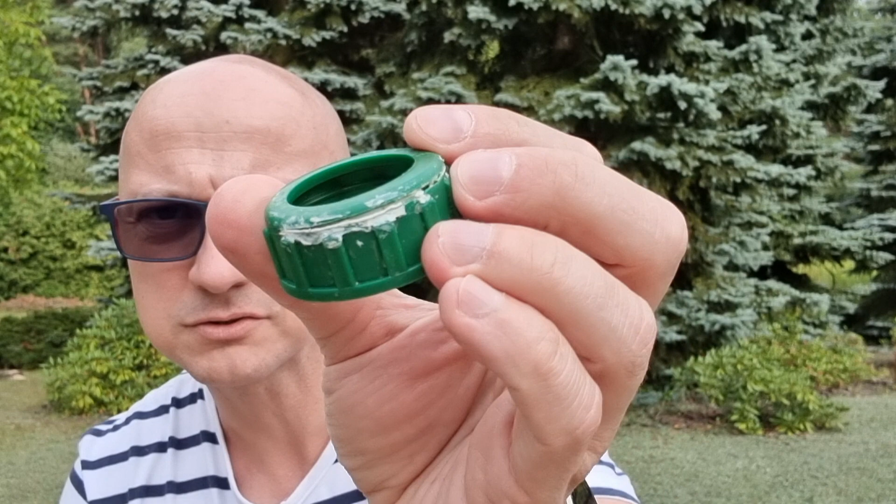So what happened here is this screw here that holds the thing in place actually broke, and as you can see here, my father tried to glue the thing, but it's super tough to glue something that is so close to your actual thread, right? So what I quickly did,

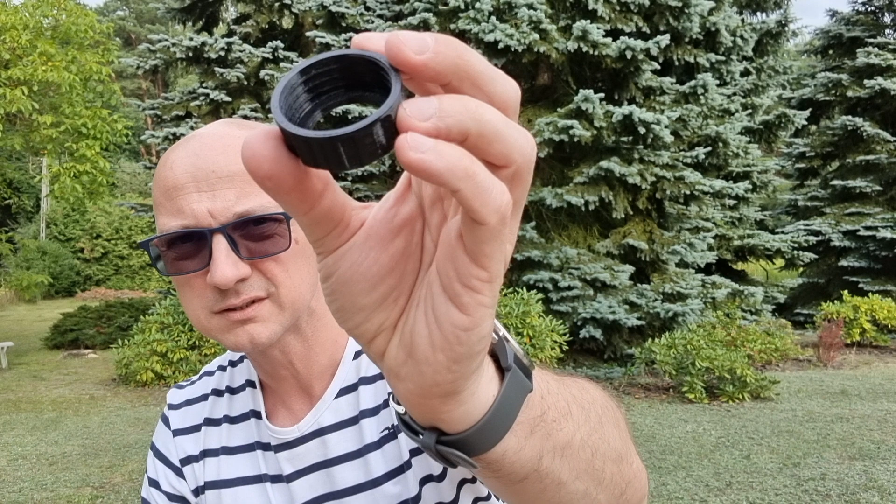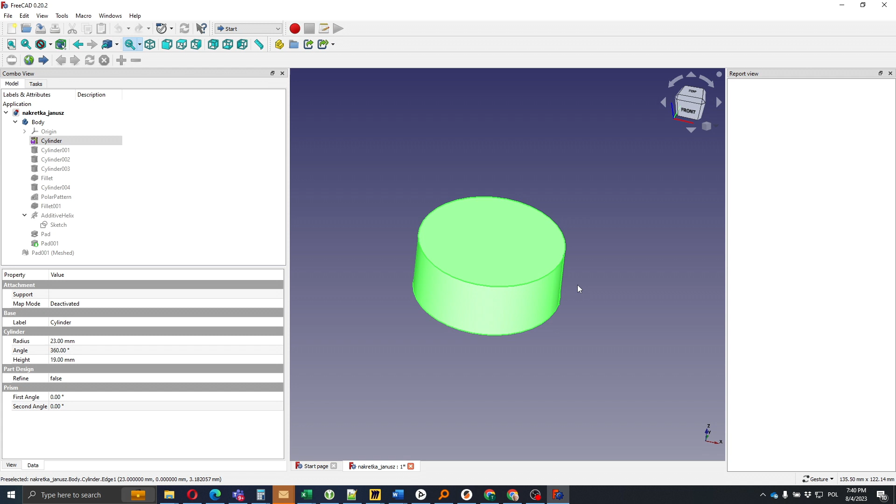I designed a spare part that here you can see quickly how it is designed. So it was not that tough because I had both sides of it to measure, so I knew what I need to design. So let's have a quick look at the design process. We need to start with the cylinder. That's the basic shape of the nut as I measured it.

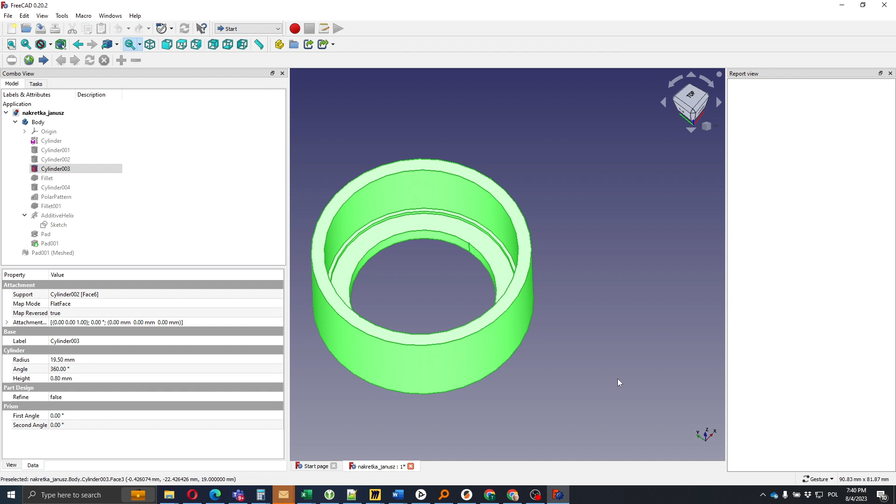Then we start with cutting a cylinder out of the first one, then another cylinder cut to make a hole, and yet another cylinder to make a place for the rubber that is part of this canister. And now what we will do, we'll fillet this edge to make it smoother.

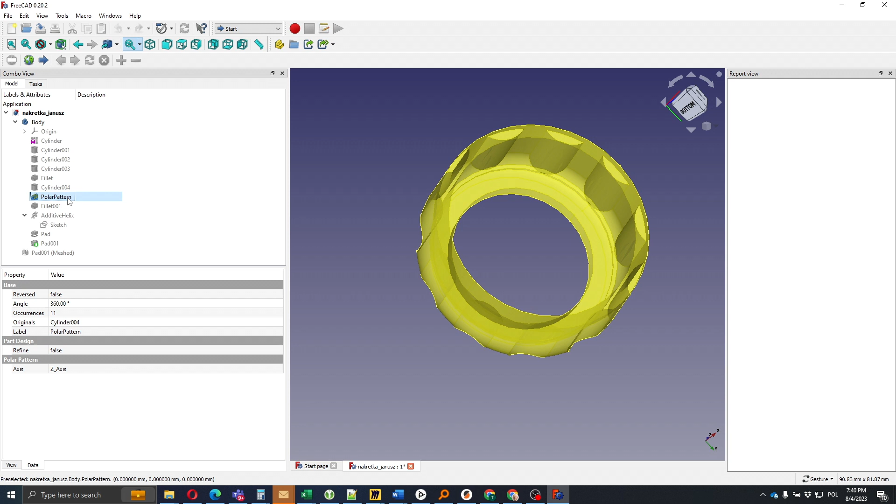And to make it easy to screw on, we need some kind of grooves on the side of it. So I've added one cylinder here as a groove, and then I've made it into a polar pattern. You can see it looks nice. And I decided I will be printing it on this face. So actually these tiny flat faces will be printed in the middle.

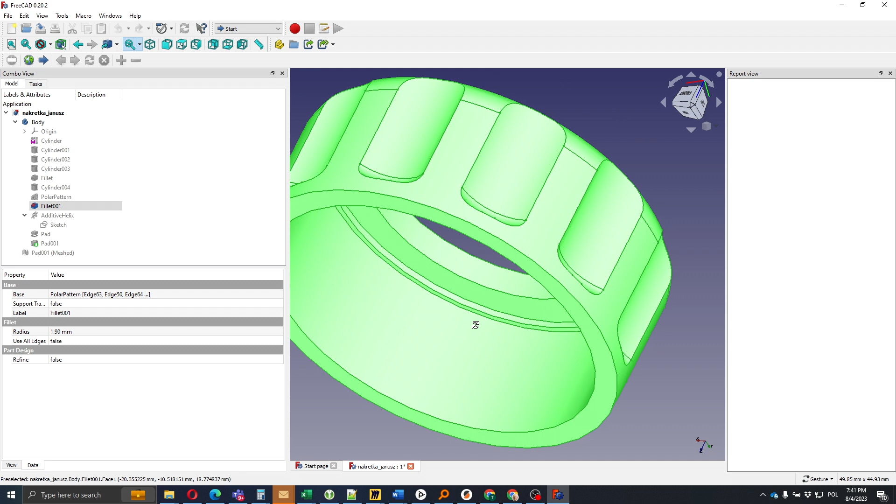They are so small that they would probably print nicely, but what I did, I added a fillet here, so the whole thing is even smoother and nicer. And now the tough part. What we need inside on this face here is a thread. So what we need to do, we need to start with a sketch. Let me use the section view. We start with a sketch

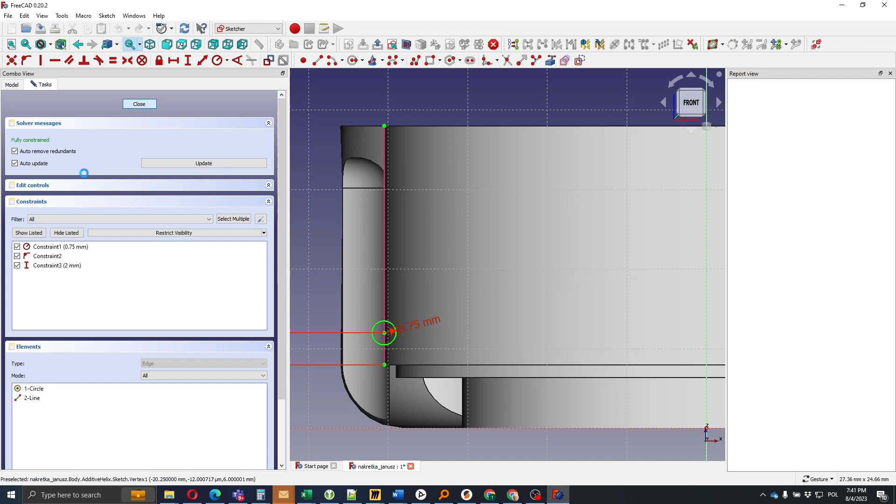and we'll make a helix. So we'll have this sketch swept over a helix. So here's the sketch, and here is the additive helix. And what you need to do, you just define the pitch of the helix, the height of the helix, and turns, and that's basically it.

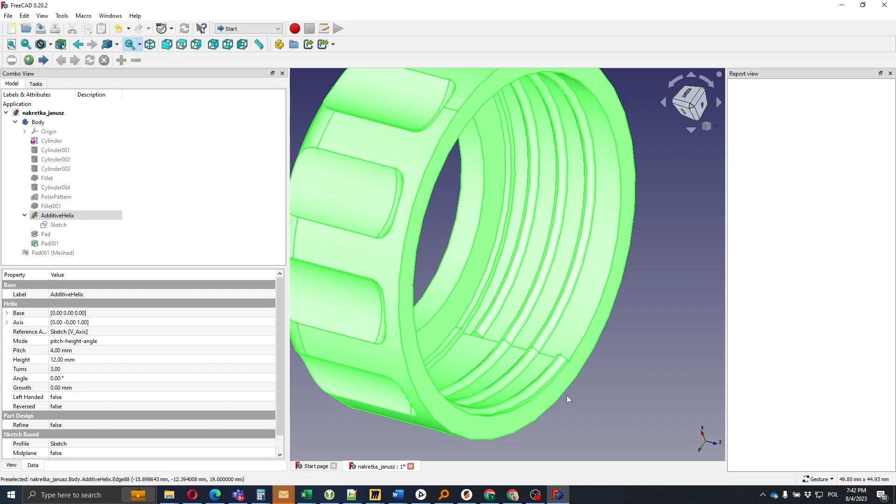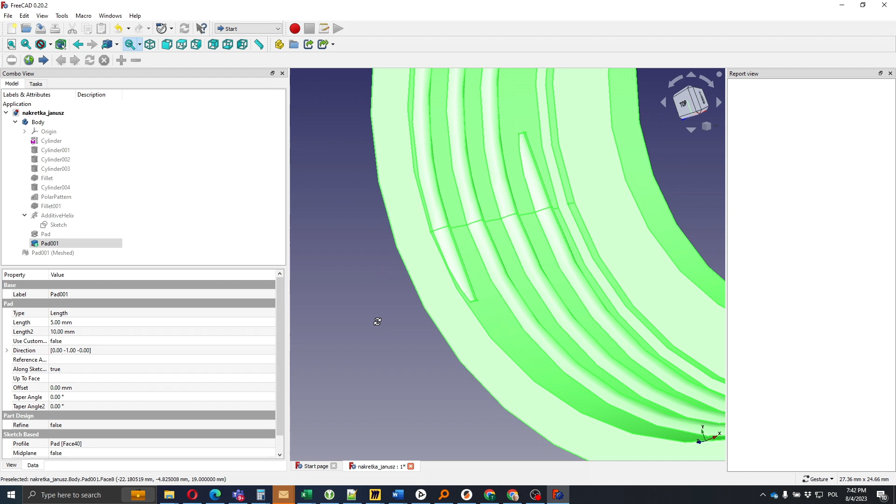So what happened here, it took our circle and just made a helix. So the last thing that I don't like about it is that this thread finishes like this here and like this here. So what I did, I actually padded it, as you can see, and as you can see here, I probably should have done it slightly different because it still ends a bit before, but it really doesn't matter.

So that's it. That's the new nut. That will be the replacement, and we will not need to throw away the whole plastic canister because of a broken nut. So let's get back to the video. And basically here it is. So let's see if it works.

We add it here, and as you can see, it screws in correctly, and ta-da, it's fixed. You don't need to buy a new thing, you don't need to throw away the whole canister because one nut is broken. So let's fix things using 3D printer.